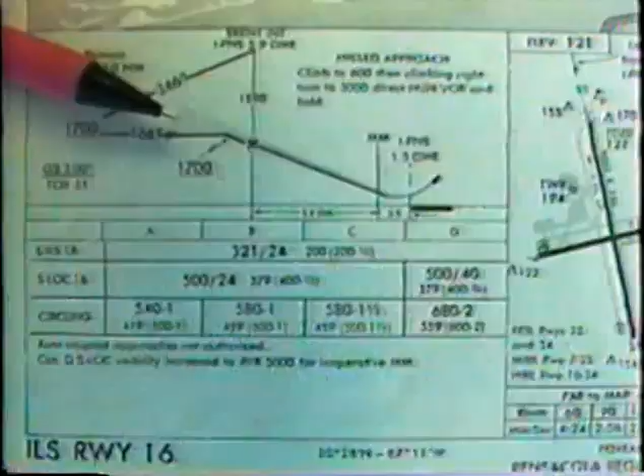There are 2 broad categories of instrument approaches: precision and non-precision. The difference, while very important, is only in the conduct of the final approach to the airport, where a precision approach provides electronic descent guidance and a non-precision approach does not. Up to the final approach fix, the following discussions of segments, fixes, altitudes, and procedure turns apply equally to precision and non-precision approaches.

Cleared for approach. This clearance authorizes you to fly the procedure on the approach plate and to descend to the published altitudes. You may not descend during an approach until you have received approach clearance and are on a published route. The published route may be any approach segment, transition, or airway. If an airway, you may descend to the MEA, but be sure it is higher than the transition or initial approach altitude. Otherwise, you will find yourself climbing later on.

When flying direct to an approach fix, you may not descend even if cleared for approach until you are on a published route.

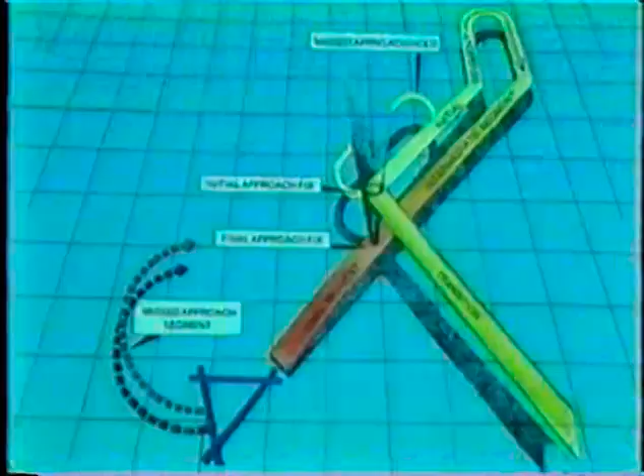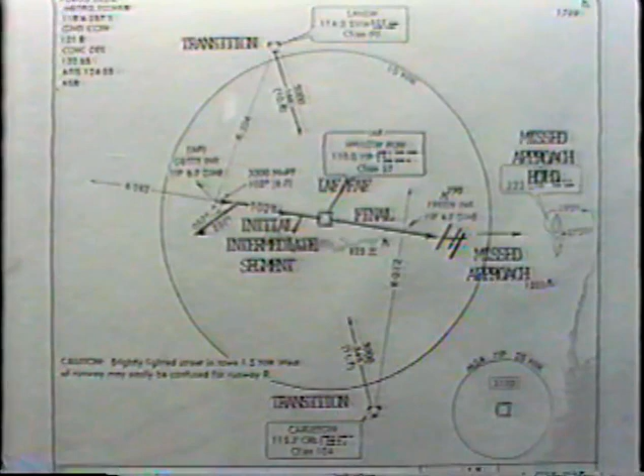This diagram shows the segments of a typical approach. The names and arrangements of the segments do not depend on the type of approach we assume it to be. An approach may have as many as 4 segments and 1 or more published transitions from the en route environment. Each segment and transition has a clearly defined course, a beginning and an end, and a published minimum altitude. The pilot has certain tasks to accomplish during each segment of the approach, and understanding the various segments of a particular approach is important in planning how the approach is to be flown.

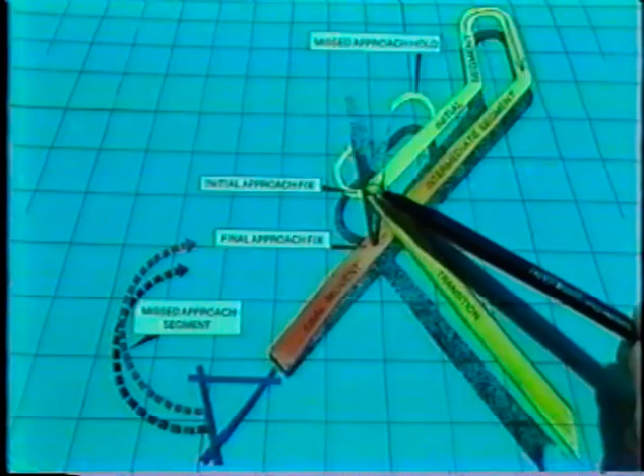Transition: the general term that describes the change from one phase of flight or flight condition to another. In other words, transition from en route flight to the approach, or transition from instrument flight to visual flight.

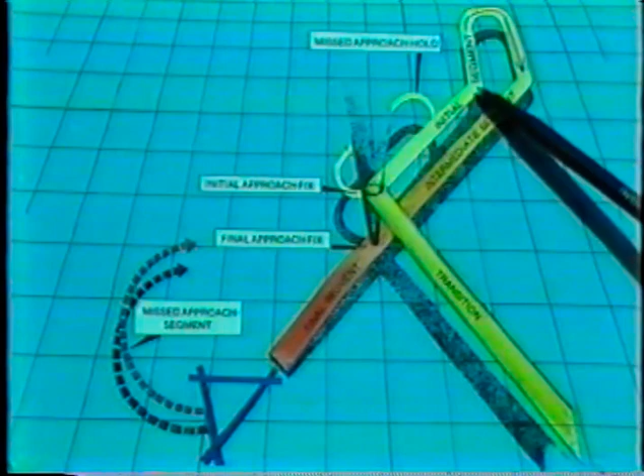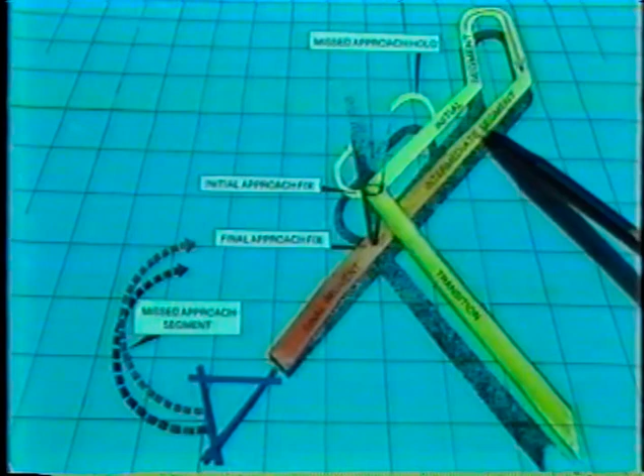Initial approach: the segment between the initial approach fix and the intermediate fix, or the point where the aircraft is established on the intermediate course or final course. Intermediate approach: the segment between the intermediate fix or point and the final approach fix. Final approach: the segment between the final approach fix or point, glide slope intercept for precision approaches, and the runway, airport, or missed approach point.

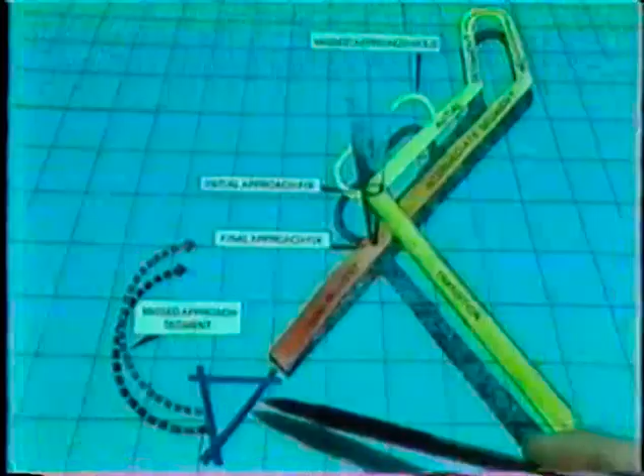Missed approach: the segment between the missed approach point or point of arrival at decision height and the missed approach fix at the prescribed altitude.

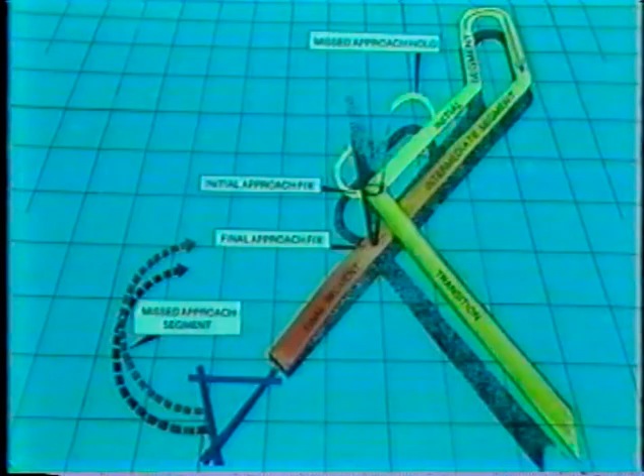This plan view shows a transition from one en route fix to the Pensacola NDB. Transitions are also called feeder routes. Assuming the pilot has received approach clearance, the pilot may descend to the altitude published on the plan view for the transition he is on.

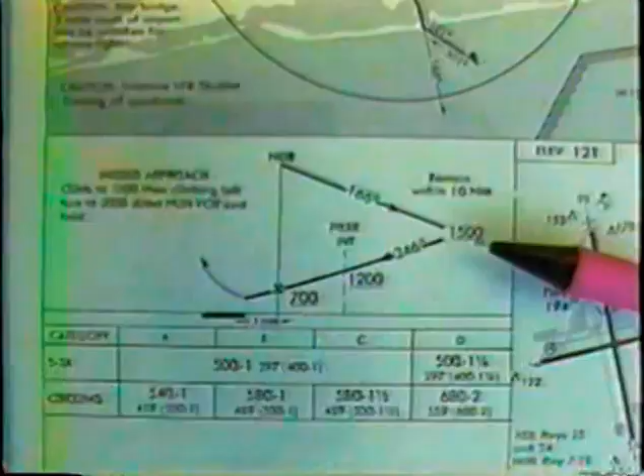The initial approach fix, marked IAF on the plan view, is the Pickens NDB and is the point where the approach begins. The initial segment begins at the IAF and is the procedure turn outbound segment of the approach. It includes the entire procedure turn and ends when the aircraft is established inbound to the fix. During this segment, the pilot should slow the airplane to approach speed and descend to the published altitude of 1,500 feet.

This particular approach has an intermediate fix, Piere intersection. The intermediate segment begins at Piere intersection when the aircraft has turned inbound on the 346-degree bearing and ends at the NDB.

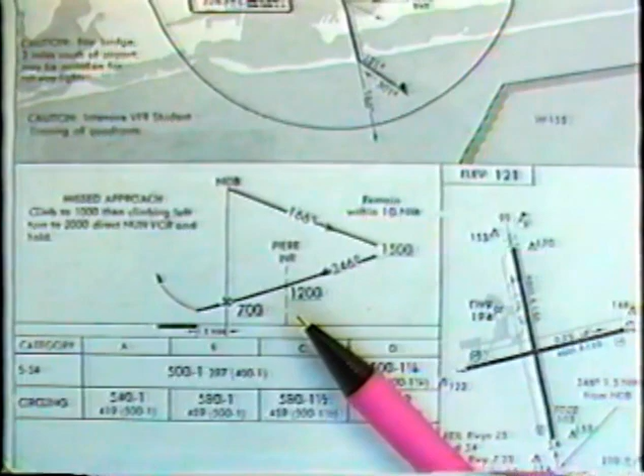Minimum sector altitudes, MSA, are not to be used during an approach. They are for emergencies only.

Here we see a 25 nautical mile circle at the top right corner of the approach plate. The notation MSA, PKZ, NDB indicates the center of the circle.

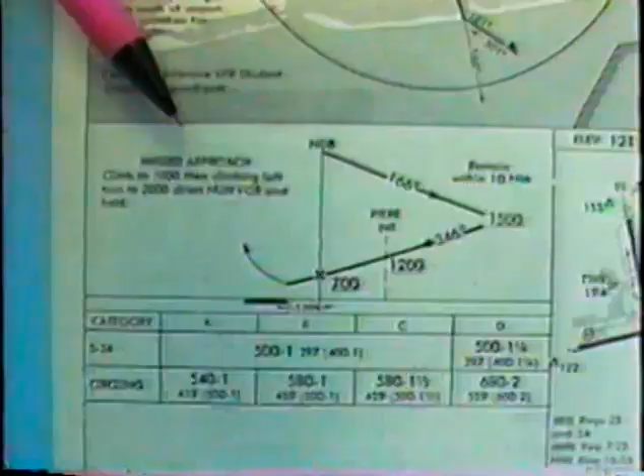It is during the procedure turn inbound segment of the approach that it's a busy time for the pilot. Here, the final landing checklist should be completed and the missed approach instructions memorized. Since the altitude specified for this segment is lower than that for the initial segment, the pilot should descend to 700 feet.

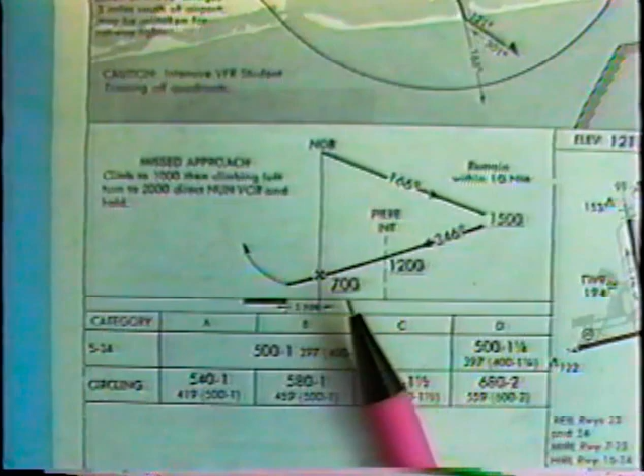The final approach fix, FAF, is the Pickens NDB and is identified by the Maltese cross on the profile view. It marks the beginning of the final letdown to the airport. When not in radar contact, the final approach fix inbound must be reported to ATC. On this approach, the final approach fix is the NDB, and the intermediate fix is located at Piere intersection.

The final approach segment is the course from the final approach fix to the missed approach point. During this segment, the final descent to minimums is made.

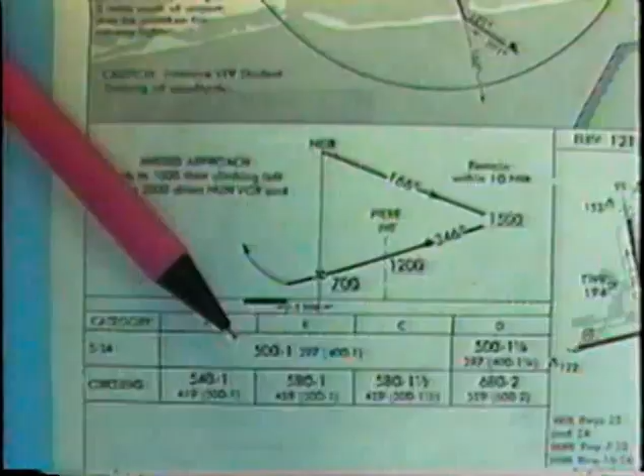Since this is a non-precision approach, in other words, there is no descent guidance, the pilot simply descends to the minimum descent altitude, MDA, of 500 feet, and levels off, carefully tracking the 346-degree bearing from the NDB until the missed approach point, MAP, is reached.

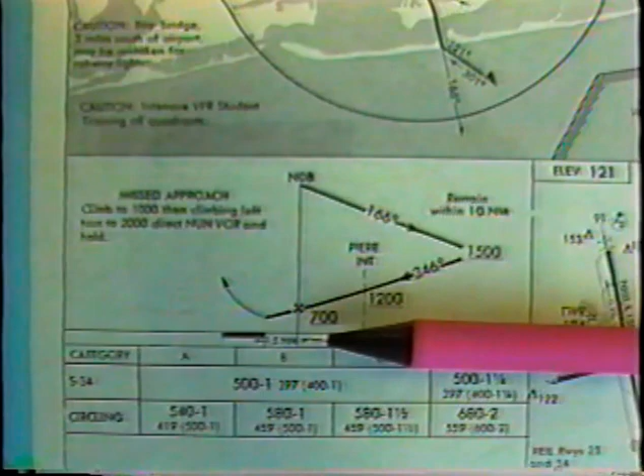On this approach, the missed approach point is 1.5 miles from the NDB, and it is usually identified by timing the final approach segment.

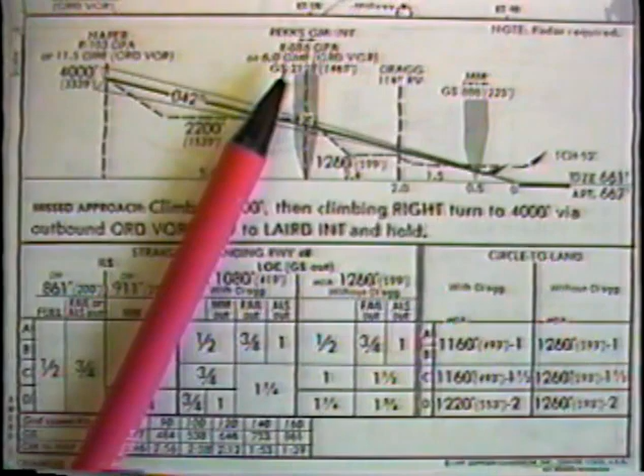In some cases, the final approach segment is divided into parts with different altitudes separated by step-down fixes. A step-down fix may be defined by a crossing radial, a DME fix, or a fan marker.

Assuming the runway is not seen, the missed approach segment begins at the missed approach point. It is crucial to immediately initiate a safe climb away from the terrain.

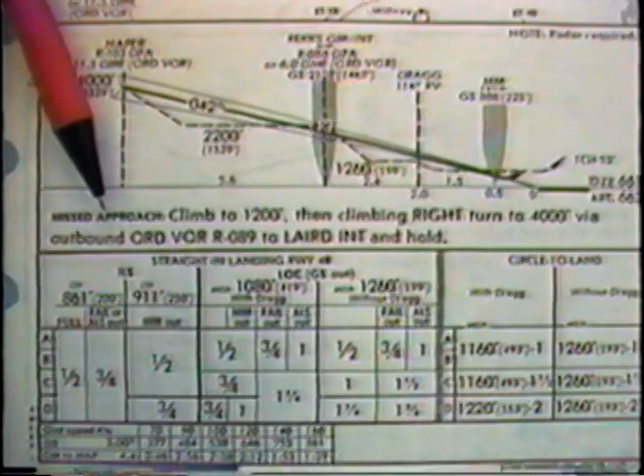The pilot should not have to refer to the approach plate for missed approach instructions now, but should have memorized them before beginning the final approach.

While a missed approach requires an ATC report, the first priority is to climb away from the ground and begin the missed approach procedure. The radio call can safely wait a moment or two.

The missed approach segment for ILS runway 4 right at Chicago O'Hare consists of climbing straight ahead to 1,200 feet, then making a climbing right turn to 4,000 feet via outbound VOR radial 089 degrees to Laird intersection and hold.

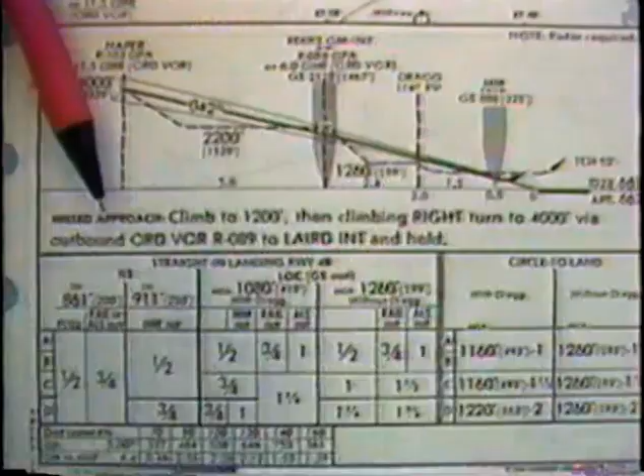The hold at Laird intersection is the published hold. This is shown in the plan view and missed approach section of the approach plate.

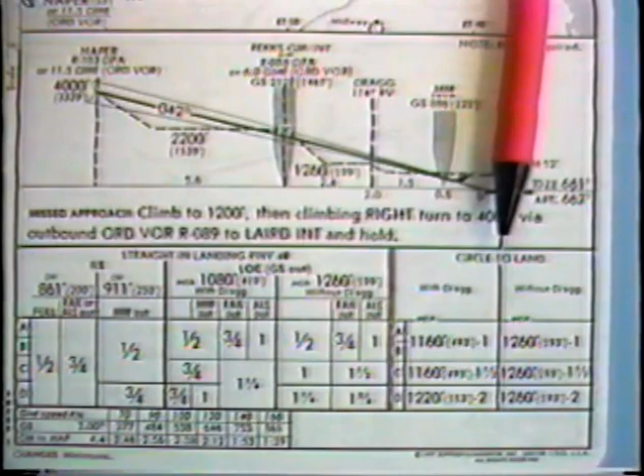If the runway is seen, a landing can be made. A straight-in landing is a landing on the runway referred to in the approach name. Landing on other than runway 4 right constitutes a circle to land maneuver and requires the use of circling minimums, even if no actual circling is done to line up with the desired runway.

If an approach name does not specify any runway, as in the Rochelle, Illinois VOR-A approach, no straight-in minimums are shown.

At a field with no control zone, circling presents an additional problem. Below 700 feet AGL, you are in uncontrolled airspace where VFR minimums are 1 mile and clear of clouds. There just might be somebody in the pattern practicing touch and goes, and you are both legal. Broadcasting your position and intentions on Unicom is your only defense against this danger.

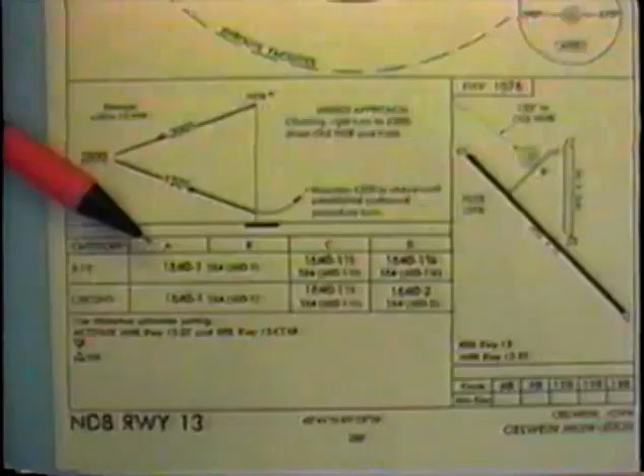The large numbers in the minimums box give minimum descent altitudes, MDA, above sea level, MSL. In the straight-in landing section, the parenthetical number is the height above touchdown, or HAT. Adding this number to the touchdown zone elevation, TDZE, shown in the profile, gives the MDA. 564 plus 1076 equals 1640.

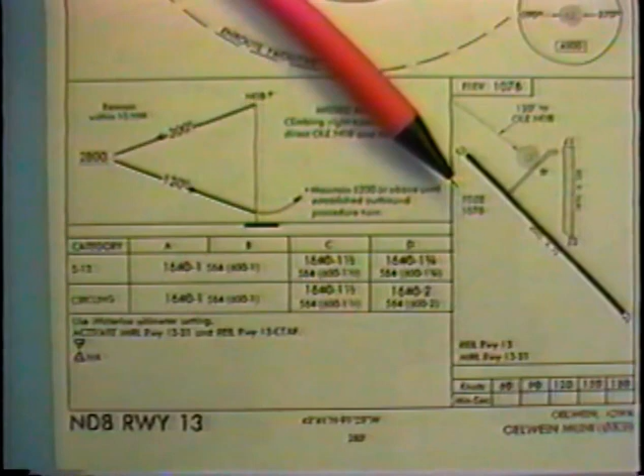The touchdown zone elevation is the highest point in the first 3,000 feet of the runway.

The parenthetical numbers in the circle to land section are height above airport, HAA. This, plus the airport elevation, the highest point on any runway, also equals the MDA. 564 plus 1076 equals 1640.

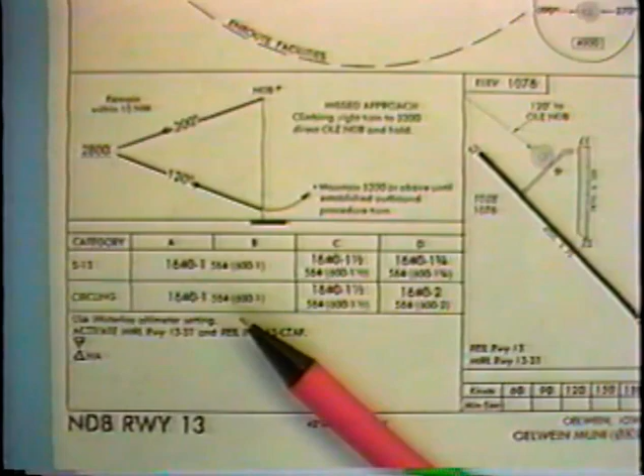The highest obstruction on a Jeppesen plate is shown by the curving black arrow.

An approach may not have a full complement of fixes, segments, and transitions. This approach shows an approach with no intermediate or final fix and no intermediate segment. On this approach, descent to the MDA is initiated at the completion of the procedure turn.

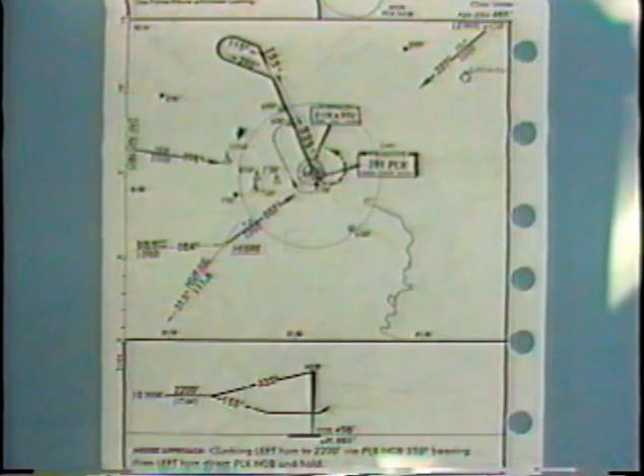The procedure turn. A procedure turn is a maneuver used to reverse direction and establish the airplane inbound on the intermediate approach segment or final approach course.

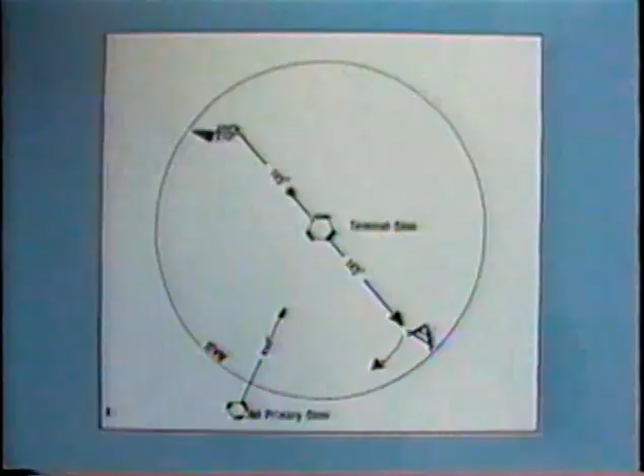If a conventional turn is shown on the approach plate, as in the illustration, the turn must be accomplished within the specified distance, usually 10 nautical miles, at or above the specified minimum altitude and on the specified side of the course. Distance and altitude information are obtained from the profile view of the approach plate.

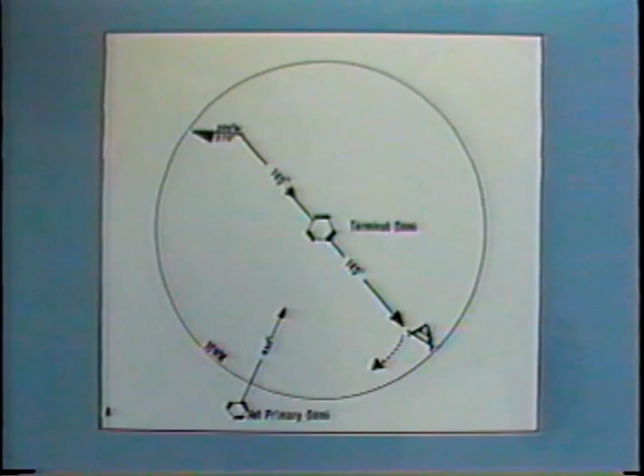The outbound distance flown before the turn is started is left to the pilot's discretion, as long as the turn is completed within the required distance from the fix.

Usually 2 minutes outbound allows sufficient time to become established inbound and descend as necessary before reaching the final approach fix. In extremely windy or turbulent conditions, the pilot may choose to lengthen this time.

The headings flown in a procedure turn are not mandatory and may be altered by the pilot to compensate for wind conditions or personal preference.

The length of the holding pattern leg is usually 1 minute and is shown on the profile view. If you need more time to get established inbound at the proper altitude, advise ATC that you wish to make another circuit in the hold. Do not extend the length of the holding pattern legs.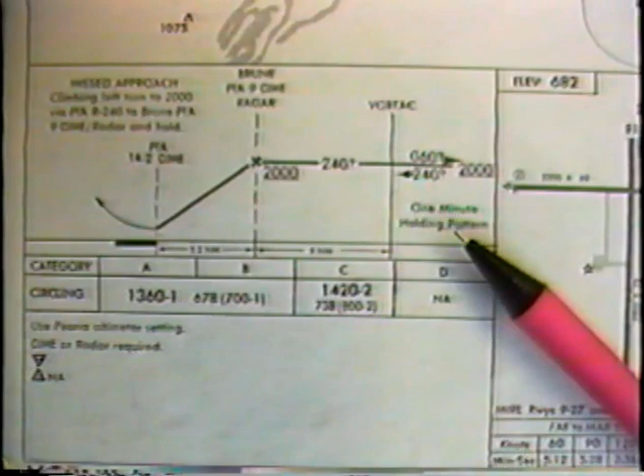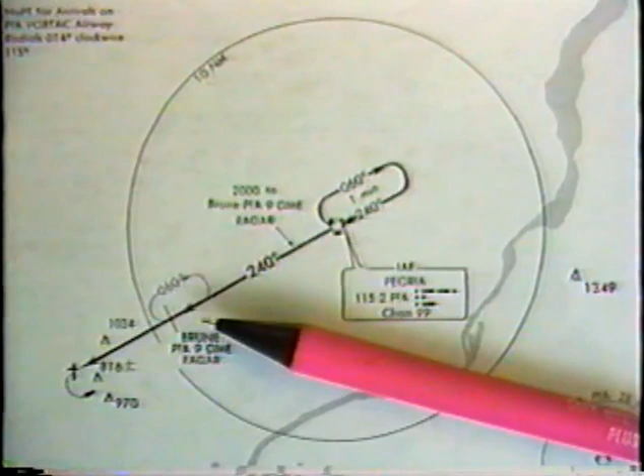Notice that the hold at the Peoria VOR is at the initial approach fix and constitutes the initial approach segment. At the completion of the hold, you are back at the VOR, which is now the intermediate approach fix, although it is never marked as such. The intermediate segment then takes you to the final approach fix, Brune intersection, defined by 9 DME miles or a radar fix on the 240-degree radial of the Peoria VOR. Notice that DME or radar is required for the Canton-Ingersoll VOR-A approach.

In addition to NDB, VOR, and VOR DME approaches, there are several less common types of non-precision approach. A localizer approach provides very accurate course guidance to the threshold of a runway. With a localizer frequency in the navigation receiver, the CDI is approximately 4 times as sensitive as when tracking a VOR course. The width of a localizer course is 3 to 6 degrees, approximately 700 feet at the runway threshold.

The CDI responds to the localizer course regardless of the OBS setting. The OBS has no function except possibly to remind the pilot of the course. Since a localizer is a component of the ILS, every ILS approach plate has LOC, or glide slope out, that's GS out, minimums published in the minimums box.

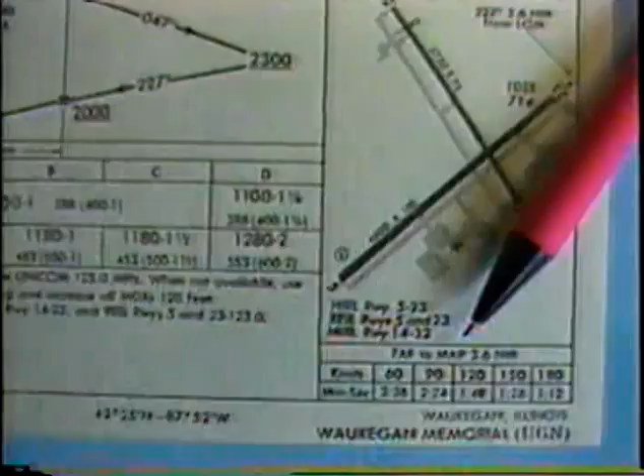In the event that a glide slope receiver fails or the glide slope is out of service, the pilot can make a localizer approach by referring to the time and ground speed box and timing from the final approach fix.

A localizer type directional aid, or LDA, is a localizer that is not aligned with a runway. It provides the same accuracy but does not bring the aircraft down the extended center line of the runway as does a localizer. There may be straight-in minimums authorized if the LDA is aligned within 30 degrees of the runway.

Airport Surveillance Radar, ASR, approaches are available at some terminals. The controller uses a special large-scale radar screen to accurately vector the airplane to the threshold of the runway. The pilot is continuously informed of his distance from the runway and his position with relation to the course center line. He will be informed when to descend to the MDA.

If on the final of an ASR approach the pilot receives no communications for 15 seconds, the rules require a missed approach. At fields where there are published ASR approaches, Jeppesen publishes separate plates for ASR approaches. Controllers are required to maintain ASR accuracy, so they are often willing to provide practice for you, the pilot, when their workload is not too heavy.

A precision approach provides descent as well as course guidance. It requires that the pilot develop the skill to control his glide path according to needle indications in the cockpit or verbal instructions from a controller on the ground.

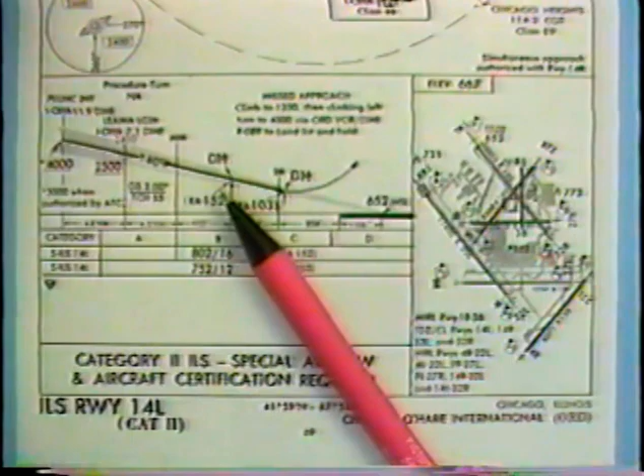The missed approach point on a precision approach occurs when the airplane on the glide slope reaches the decision height. At this altitude, the pilot must either make visual contact with the runway or runway environment or execute a missed approach. There is no leveling off at decision height. Either continue visually to a landing or immediately start the missed approach.

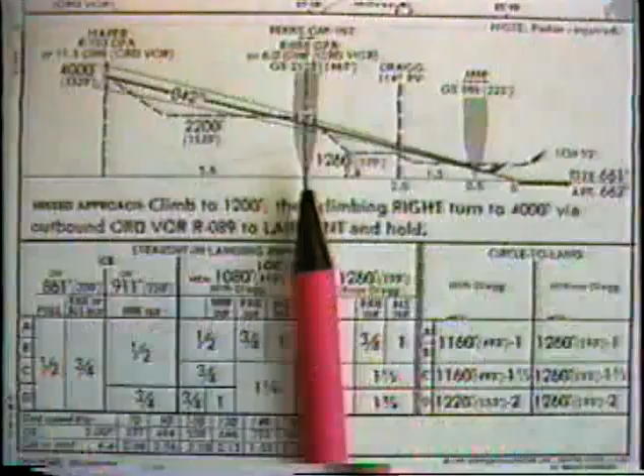The outer marker is roughly 5 miles from the runway, approximately where an aircraft at the intermediate approach altitude will intercept the glide slope. The middle marker is approximately 1/2 mile from the threshold, about where an airplane on the glide slope reaches decision height.

There may be a low-power NDB known as a compass locator at the outer or middle marker. These are then called locator outer markers, LOMs, or locator middle markers, LMMs.

In addition to the 4 elements, outer marker, middle marker, localizer, and glide slope, an approach lighting system, or ALS, is usually associated with an ILS. These systems offer a large array of brilliant lighting as far as 1/2 mile from the runway. They can be seen by the pilot in all but the worst of weather.

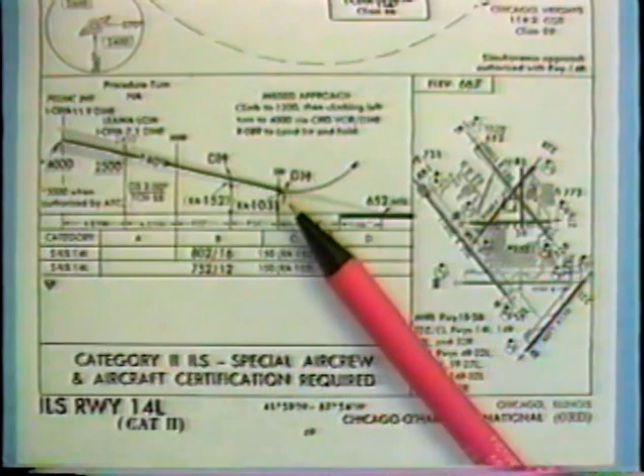The decision height on a typical ILS is 200 feet above the touchdown zone. A Category 2 ILS offers a decision height of 150 or 100 feet above the touchdown zone, but is usable only by specially certified aircraft and crew.

Before you reach the initial fix of an ILS, there may be as many as 5 radios to set up. The ILS frequency itself must be tuned in to the number 1 nav radio and identified. If there is an outer compass locator, it should be tuned and identified on the ADF. The marker beacons should be tested and the audio switch and volume control checked in the right position.

If you are working approach control, the tower frequency should be entered in your other comm radio to avoid having to switch frequencies at a crucial moment of the approach. Lastly, the second nav radio may need to be tuned to the missed approach fix or to a step-down fix.

On the ILS, there is some heading which will exactly compensate for wind and keep the airplane on course. It is called the reference heading, and your first job is to determine, by bracketing, exactly what this heading is. It may equal the course shown on the approach plate, or, owing to wind or DG precession, it may be something different.

As the aircraft starts to intercept the localizer, the CDI will move from full-scale deflection towards the center. As soon as the needle moves, begin turning the airplane toward the final course, assuming approach clearance has been received. When the CDI stops moving, stop turning. The DG now shows the first approximation to the reference heading. If the needle moves slightly, turn 5 degrees toward the movement. Continue bracketing with smaller turns until it stops completely.